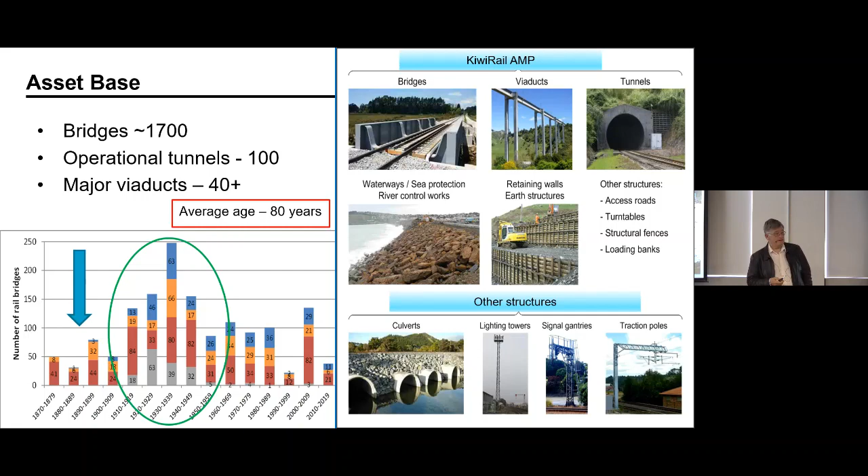Well, certainly not here to teach you how to suck eggs. Everybody knows about the deterioration models or the curve. You get a new asset, it deteriorates. It's like a body, it's like a person. You get born and then you start deteriorating. So you need a bit of maintenance along the road, make sure that gradual deterioration gets under control. But then you get to a minimum level of service where you need a hip replacement or something serious needs to happen to you to make you work again. And then we go into the cycle again. So that is, in theory, a very simple concept, no problem.

On the asset management strategy side, to do all that, we've got certain ways we can do it. We can replace a light bulb every year, regardless of whether it's working or not. You just replace it. Then we know it's going to be always in a good condition. Or you can let it go right down to the bottom where it started flickering, and then you decide, well, I better do something about it. In between there is a sort of risk area, which you can say, well, that's where we want to aim to be. It's a proactive risk-based asset management process.

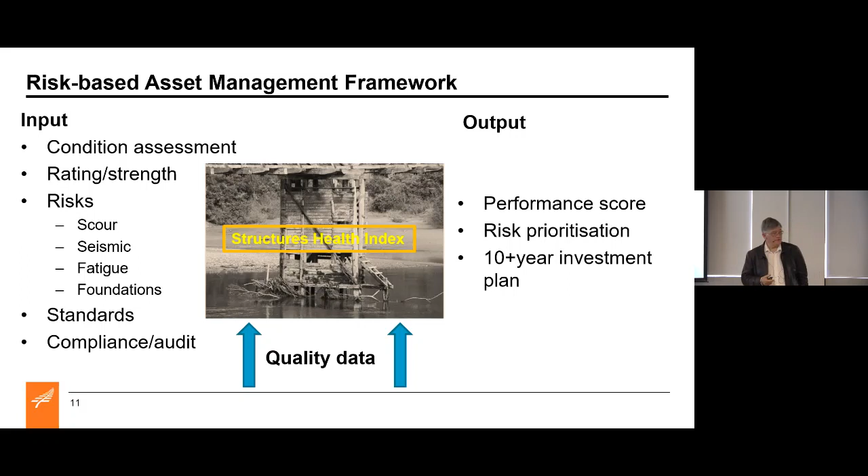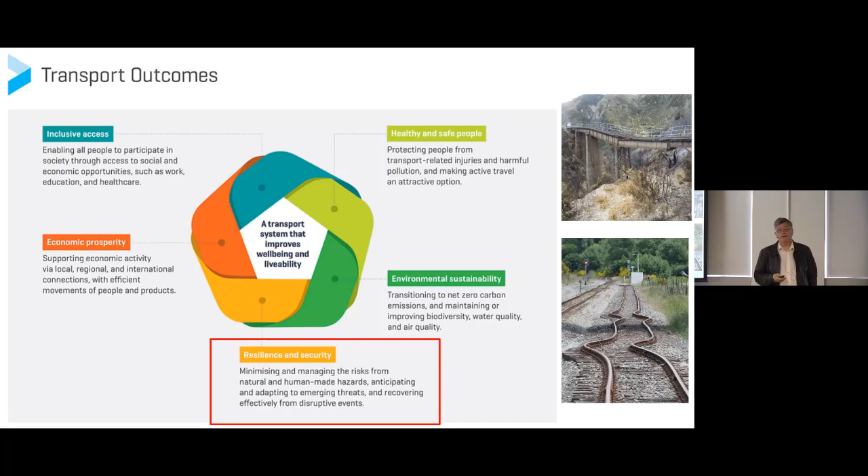I thought I shouldn't mention politics, but anyway, the one thing that is also quite good to know is that last year there was a Ministry of Transport conference whereby they discussed certain things about the transport system in New Zealand, and resilience and security is one of the key factors there. But one of the goals of that conference was to talk about the importance of data-driven decision making and the importance of data and quality data in making decisions. So evidence-based decisions around asset management. So we are certainly on the right track, to use a pun, but it was reassuring to hear that.

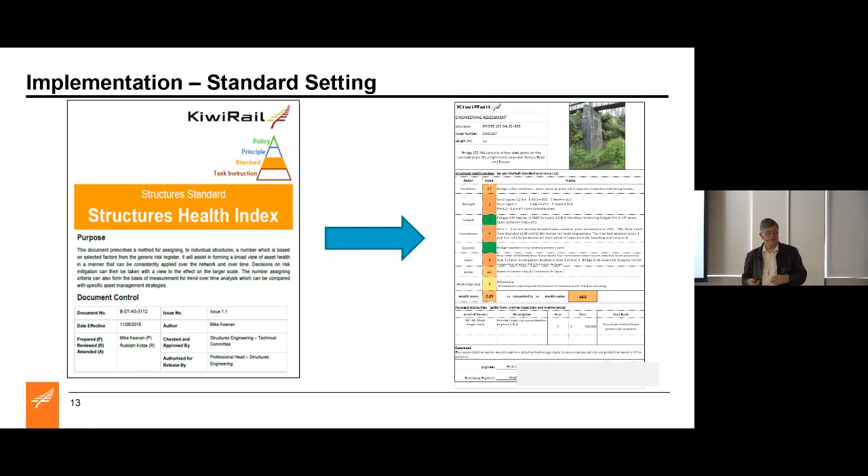So where we are roughly at the moment is we've got a standard. We call it the Structures Health Index. I'd like to refer to it more like a performance index. It gives us the ability to look at an asset like a bridge and actually categorize each of those key risk factors, right? And by the end of that process, we end up with a score, out of 1 to 100, 100 being great, 1 being really bad. But anyway, we can now calculate a number. And when you've got a number, you can start looking at the digital world and process that. And that's really the first step where we want to end up.

I spoke about the data we have. We have a lot of information. We've had historically a lot of information in different formats. So, for example, looking at condition, we had condition reports in cupboards. We could then extract information out of that. We had risk assessments done by consultants in previous years. They used a certain matrix and ranking. Others did another ranking. So we had to normalize the information in all these studies into a 1 to 4. We decided a 1 to 4 sounds good. We'll normalize that by judgment into a 1 to 4 standard. And once we've got that, we can actually move forward to start doing comparisons between different data sets and different systems.

The bottom left-hand corner, I've highlighted, you may not be able to read it, but it says knowledge gap. And that we introduced as a risk factor as well. It's not a technical factor, but it is very important when it comes to data. If we don't know anything about a bridge, that's a huge risk for us. That really is when things start falling to pieces. You don't even know there's a problem. So we put that in there as a factor so we can start looking at that; it could drive certain decisions for investment. We don't know anything about the bridge.

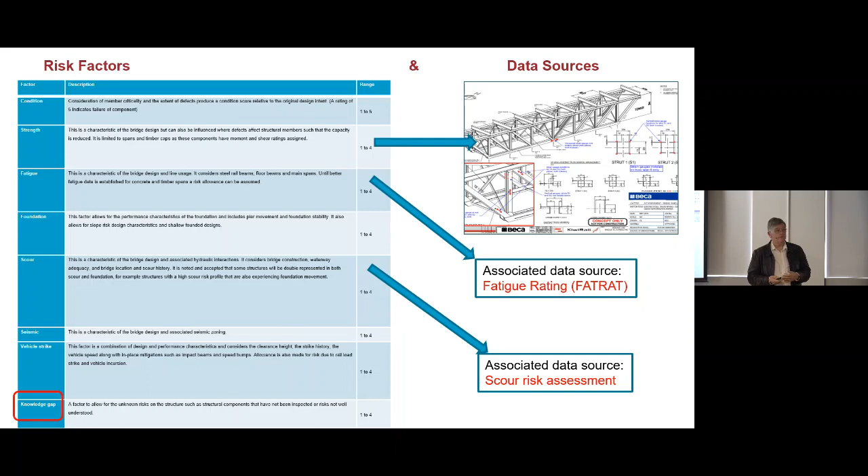We need to do an assessment, give us some money to do it. So when we get more information, that score goes down and the overall health improves. So I'll flick through these quickly, some of the documentation we have.

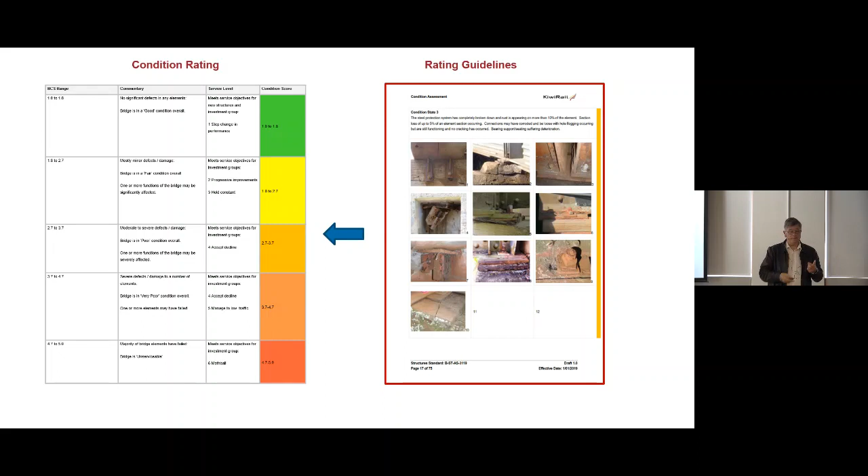So we've got a guideline for the inspectors and engineers in terms of condition rating. What do we mean by a 1 to 4 for a steel member? How do we rate that? And we came up with a guideline, a book, saying if you see that's roughly that, probably it's a 2 or a 3. Remembering that the inspectors do that, and then it comes back to engineers, we do a review, and we end up with an agreed score.

The same for strength. We could map that against our current loads and future-proofing loads. And seismic at this stage is probably the area where we are most exposed. We can rank bridges in terms of location and hazard zones, but we haven't really looked at the individual bridges as such. And we've now got a pilot study in the Wellington region where we've come up with a seismic screening model, and we're going to be piloting that to see whether we can enhance our knowledge, looking at the types of structures, get a better score on the seismic side. That will probably trigger detailed assessments on certain bridges, which is really going to be a good process.

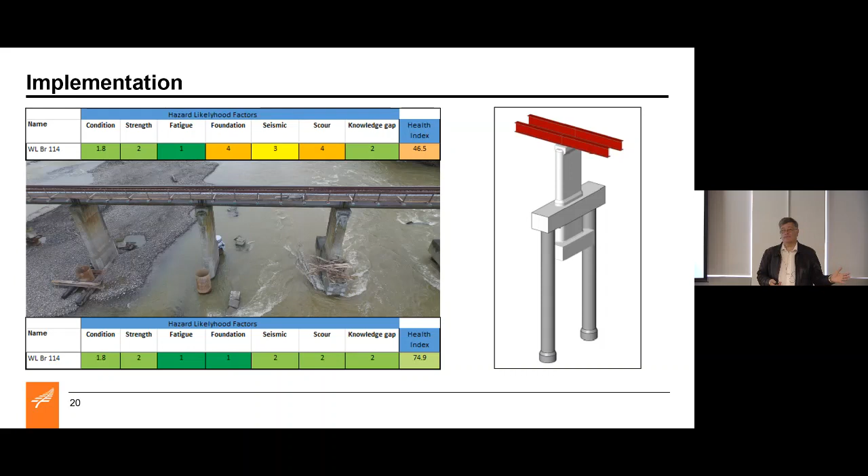Now, all I'm saying here is that we now have a measure, a story to tell to investors saying you've spent 2 million on this bridge, you've taken the health from there to there. And on that graph of ours, the level of service has gone up. At least we can now start telling a corporate story as opposed to an engineering one. And that's as simple as this process is with the right amount of data.

We know which bridges to go and look at, and we can then put that into a forwards work program, and everybody can say, yes, we're comfortable with that. Do we do it in 1 year or over 10 years? Doesn't matter. But at least we've now got a definition of which ones we tackle and which ones we leave. That has resulted in us coming up with a prioritized list of our bridges, all of our risk factors. When I say all, I'll come back to that.

And out of that, we've written a 10-year investment plan to support our asset management plan, which is going into our funding cycle right now. So I guess moving back to 2016, the red button is now there, and I can push it, and it'll give me an answer. It gets better, and this is where we've moved on since the last time we discussed this.

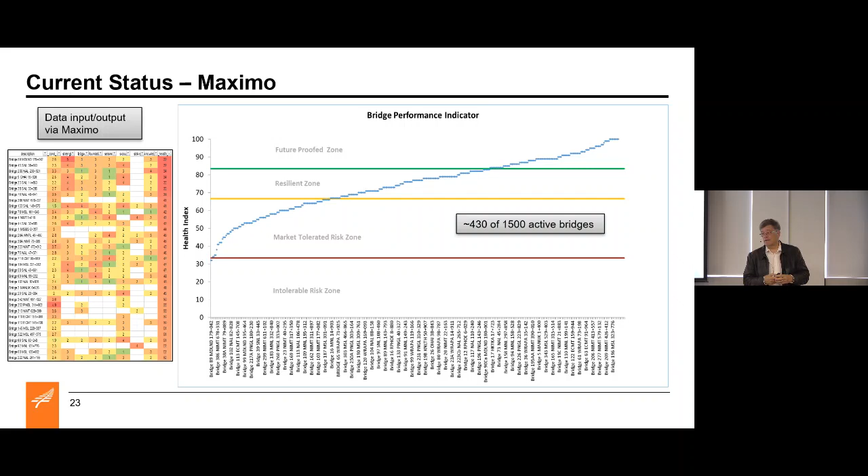But at the end of all of this, when I turn back to the risk-based system, the ideal is that we don't have to go out every 6 years. We can go for a particular bridge every 20 years or 15 years, but it has to be coupled to the health or some kind of measure. And we now have the ability to say, for those bridges between that band, we can go every 10 years rather than every 6. So the potential of using this information is now becoming really tangible and good for the future.

Ongoing systems development - I'll rush through this. It's data collection, going back to that slide where I talked about the safety of the health and safety of people. We've been using drones for many years now, actually, with some of the earlier uptake of it. It's been helping our inspectors do their general inspections, and in some cases getting access for detailed inspections.

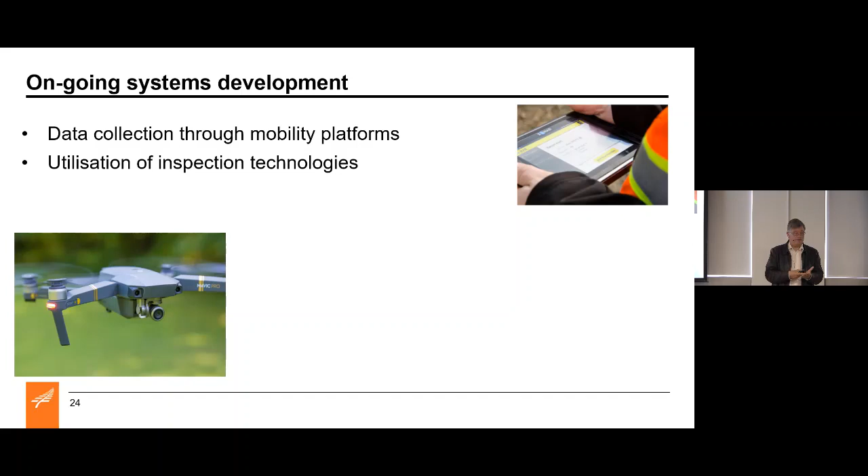With the definition of cameras getting better and better, it's getting easier, and they're getting smaller and less likely to fly into the bridges these days. So that's great. They've got their tablets, and they can now do mobility in field and upload data. Not perfect - there's a few niggles to sort out still, but the process is in place.

And then real-time instrumentation. We have a couple of bridges where we do this, but I'm very strongly convinced that before you embark on instrumenting your bridges as a substitute for visual inspection, you really need to know what your issue is that you're trying to solve. Why are you going to put those things on the bridge, and what are you going to do with the information? If you don't know that, it's lovely to have these dashboards and impress people, but that's not enough.

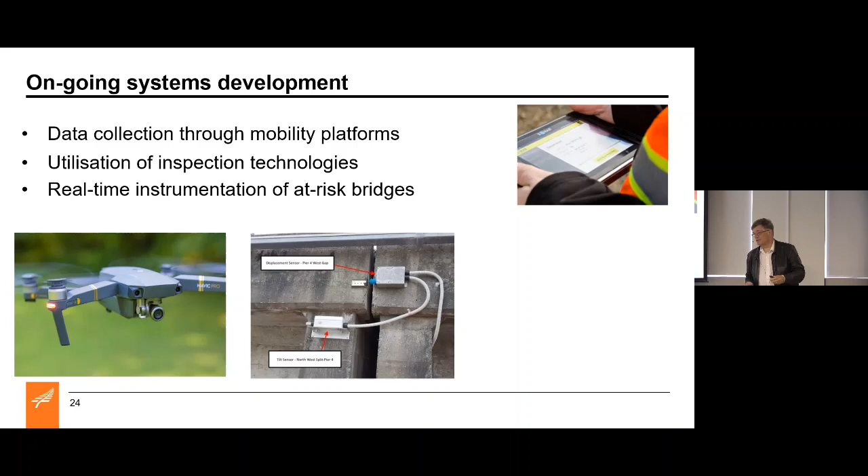Where we do have to, we install that and we follow through. The challenge is going to be, with all the gazillions of gigabytes being generated, how we store that and how we process that in our systems. I think the limitation will eventually be - it's getting bigger and bigger, the clouds are getting bigger, we'll have more space - but you need to be able to retrieve that overload of information, you need to filter it out into data that we can understand and use.

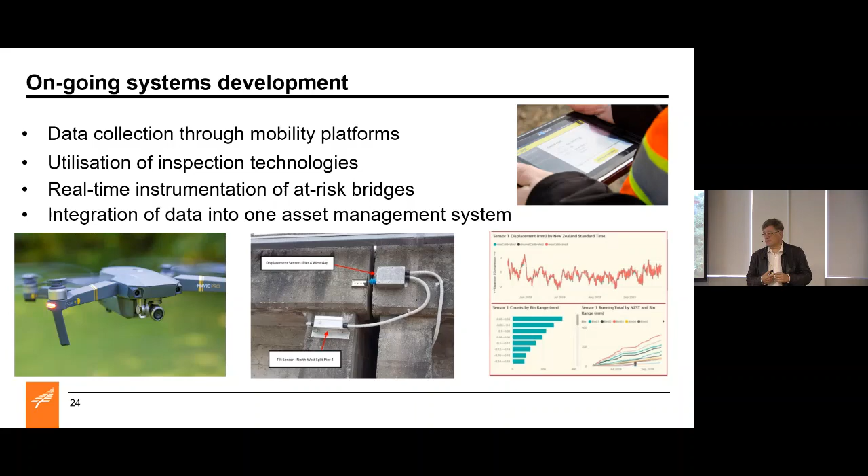I think that is about as much as I need to say, and I'm more than happy to take some easy questions.